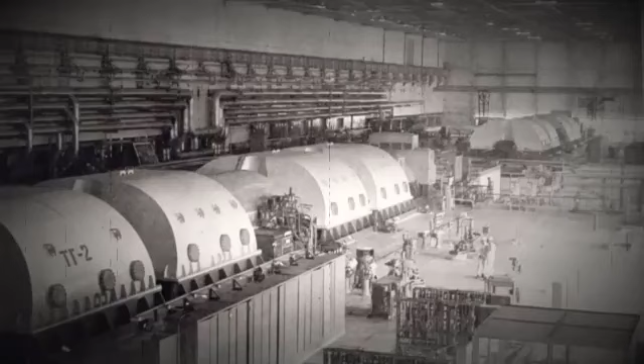The nuclear power plant had the first of its 4 reactors ready to operate in 1977, followed by number 2 in 1978. As a quick side note, Units 1 and 2 were the first generation RBMK 1000 reactors, and because of this they had slightly different core loadings and containment structures. But the remaining 2 reactors at Chernobyl were of a slightly more modern second generation, and they were named Units 3 and 4, which went online in 1981 and 1983 respectively.

There were plans for another 2 units, but these were abandoned after 1986 when risks of contamination left the project untenable. The nameplate capacity of Chernobyl Nuclear Power Plant was Unit 1 at 1000 megawatts of electricity, Unit 2 at 1000 megawatts of electricity, Unit 3 also had 1000 megawatts of electricity, and the same with Unit 4.

In this video, I'll be focusing on the second generation RBMK, its design, and more specifically Unit 4. But I did look into the first generation in the Leningrad video.

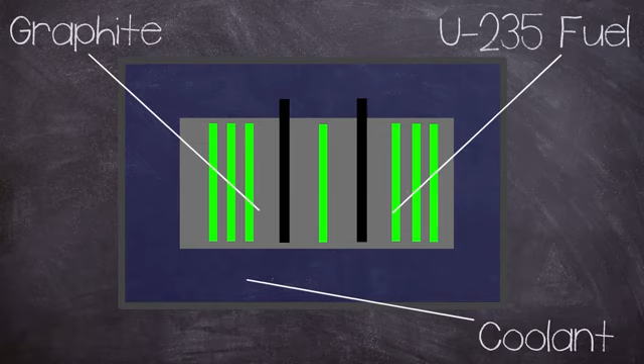The RBMK was a bit of a unique design in the reactor world, but it was a product of evolution rather than revolution, in that it used graphite to moderate the chain reaction with light water as a coolant. This combination allowed it to use lower enrichment uranium-235 for fuel, which is significantly cheaper than other reactor designs. The RBMK had a very large core region consisting of a height of 7 metres and a diameter of 11.8 metres, which was mounted in a steel cylinder that was placed on top of a biological shield.

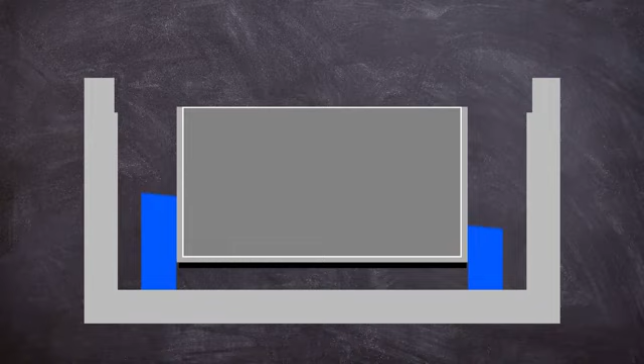The steel cylinder was 16mm thick and had a diameter of 14.52 metres by a height of 9.75 metres, dug into the floor of the reactor building, inside a reinforced concrete lined pit. Between the steel wall and the concrete lining, a water tank was placed, followed by a sand packing. Below the bottom biological shield, there were several basements used for pipework for the reactor core cooling loops.

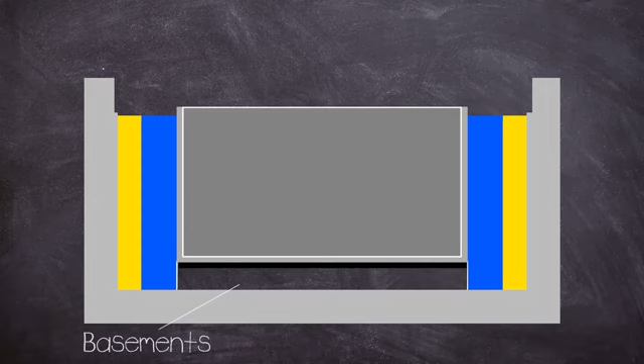The core consisted of graphite blocks sized 25 by 25 centimeters, stacked up with holes drilled through the center for fuel and control channels.

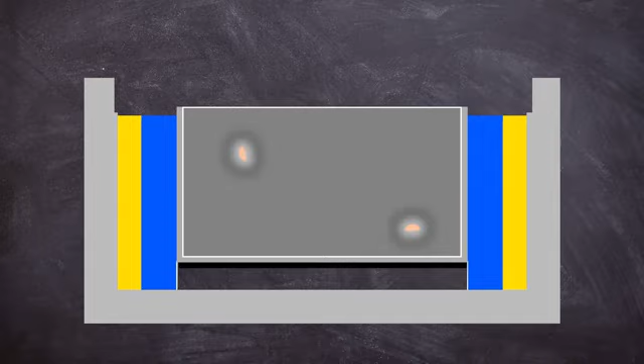The size of the core could cause issues in reactivity control during operation, but we will talk about that a bit later on. On top of the core, another biological shield was placed with a steel cover on top of it, which formed the floor of the reactor hall.

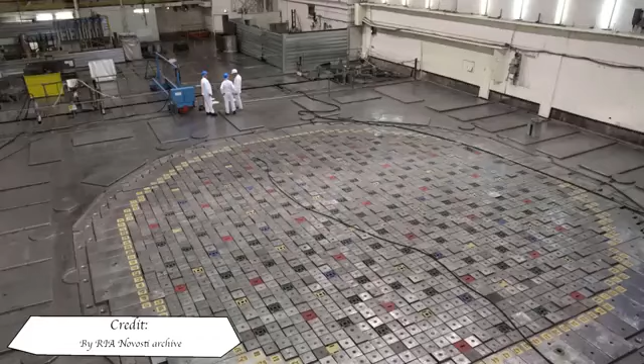The cover plate was capable of withstanding a pressure build-up resulting from steam released by two simultaneous channel ruptures. All of this allowed the design to be refueled whilst in operation, which again helped with costs by reducing downtime.

As a side effect of this, the confinement structure of RBMK reactors is less than ideal, as the tall refueling machine had to be housed inside the reactor hall. Because of the large floor space and subsequent roof requirements, the vast quantities of heavy concrete wouldn't have been architecturally, or more importantly, financially viable.

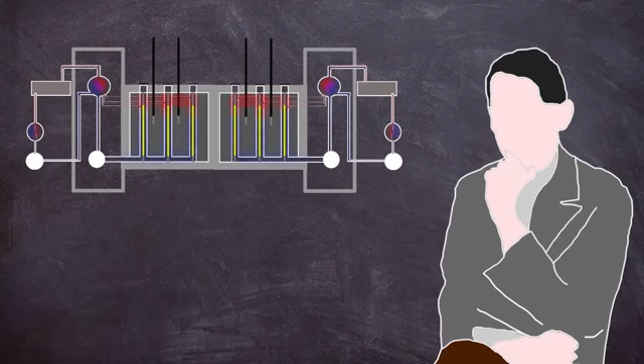The RBMK didn't have a prototype and was instead put straight into production, with the first reactor being installed in Leningrad in 1970. The original designs omitted confinement, instead claiming that the fuel being in its own channel with flowing cooling water was an acceptable alternative.

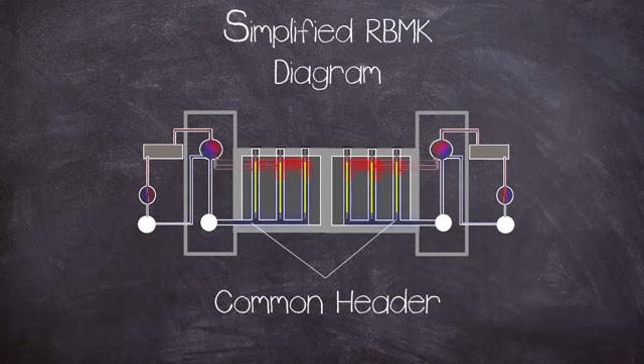The main takeaway from this is confinement was poor, resulting in disastrous results in the case of a fission product release. The coolant was pumped through the core, from the bottom common header through a high pressure tube that jacketed the fuel elements, where the water would boil. Coolant water also circulated in the control rod channels.

The primary cooling of the reactor was via two separate cooling circuits, one for each half of the core, meaning everything was doubled up, leading to four main circulating pumps, which were three operating, and one standby per loop.

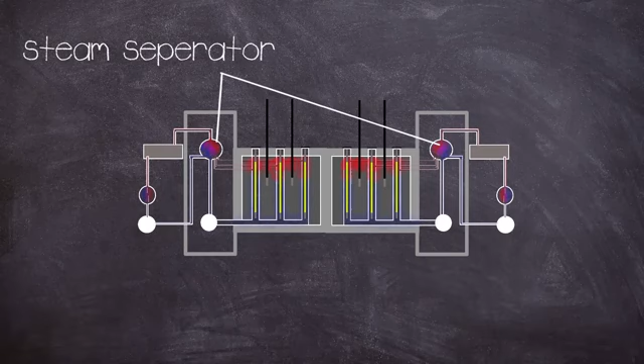As the coolant boils, it exits the top of the core and is passed through a water steam separator, which takes the steam to high then low pressure turbines that generate the electricity. The steam is then passed through a condenser that turns it back into water to be pumped back into the core, completing the primary cooling circuit.

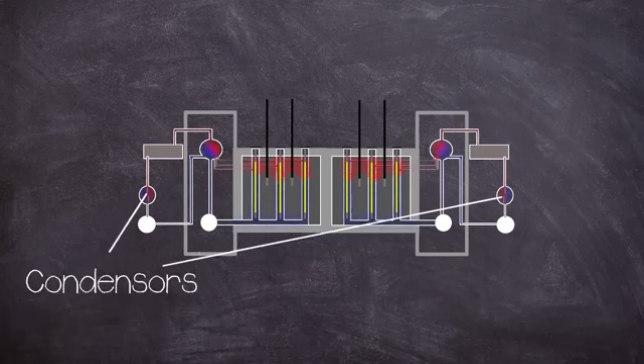The condenser is cooled by using a separate secondary water cooling circuit, meaning the primary cooling circuit is self-contained. As mentioned before, the reactor employed graphite blocks for its moderator.

Now, a moderator is used to reduce the speed of fast neutrons released from fission, so they can better facilitate a chain reaction, getting more use out of the fuel. Ideally, moderators work without capturing any neutrons, leaving them as thermal neutrons.

But where the design has its potential flaw is having a separate coolant that can also absorb neutrons, which can make the reactor unstable in certain situations. This brings up the big elephant in the room, and that is void coefficient.

You see, it wasn't just the graphite that had moderation characteristics, but the coolant water as well, because H2O naturally slows down and absorbs neutrons. This brings a problem for the reactor, as with the increase in temperature from fission, the coolant boils off into

steam, known as voids, i.e. a bubble that does not absorb neutrons. With the steam not absorbing neutrons, this leads to an increase in the power of the reactor.

The RBMK did not rely solely on its coolant for moderation, because that's what the graphite was for, but the water did absorb neutrons, meaning that as it boiled off, the operators had to compensate for this with the control system.

If not properly managed, an incident of a runaway can happen as the coolant heats up, increasing reactivity, heating up the coolant more, creating more steam, leading to greater reactivity, and this is called a feedback loop. During this reactor state, more and more neutrons are produced and their density grows exponentially fast, creating a positive void coefficient. The risks of a feedback loop were greater at certain power levels, but this will be covered later on.

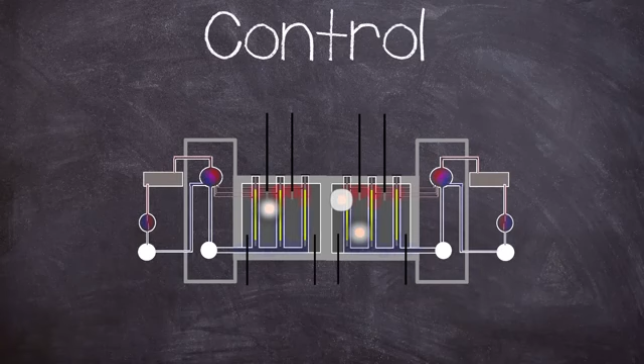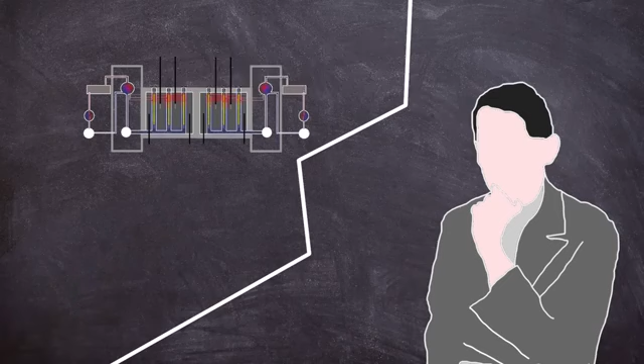And this leads on to the strange design choice for both top-loaded and bottom-loaded control rods. There were 167 top-loaded rods and 32 shortened rods loaded via the bottom, and another 12 automatic controls inserted from the top. The shortened rods were used to manage axial power distribution, which was necessary due to the core size to manage hotspots.

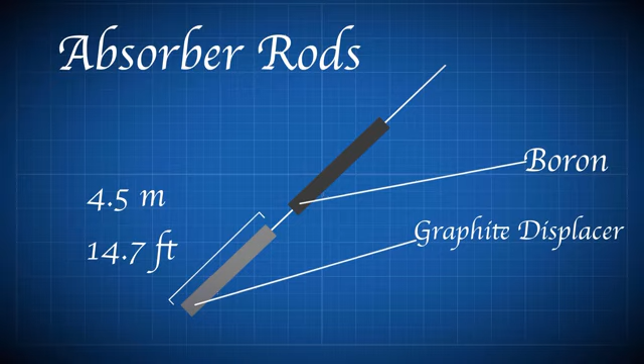The main control rods had a 4.5 metre long graphite rod termed a displacer attached to the end of the length of the control rods, except for the 12 rods that were used in automatic control.

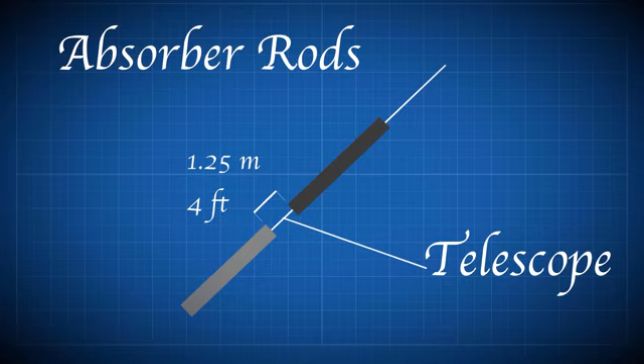The displacer connected to its rod via a telescope, with a water-filled space of 1.25 metres separating the displacer and absorbing rod. This was to stop water filling the space left behind by the control rod after it left the core region, which would parasitically absorb neutrons.

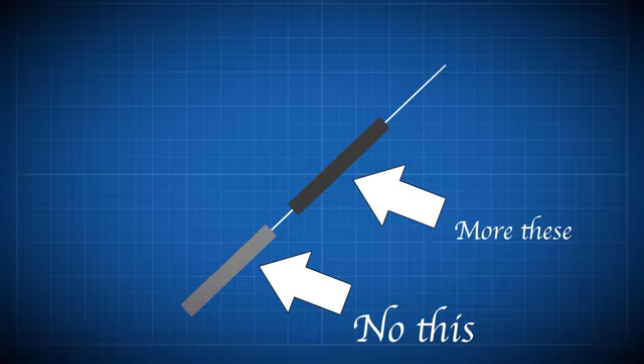Because removing one neutron absorber in the form of a boron control rod would be replaced by another neutron absorber, albeit weaker, in the form of H2O, this kind of defeats the point of a control rod. Thus, if there was no displacer, more control rods would be needed, as each one would have less of an effect on the reactivity of the core.

The dimensions of the rod and displacer were such that, when the control rod was fully extracted, the displacer sat centrally within the fueled region of the core, with 1.25 metres of water at either end. But this setup in certain situations could cause a positive scram effect.

On receipt of a scram signal causing a fully withdrawn rod to fall, water was displaced from the lower part of the channel as the rod moved downwards. This caused a localised insertion of positive reactivity in the lower part of the core.

This was because the RBMK had a high moderator to fuel ratio, meaning the lower part of the core would experience a spike in reactivity as the graphite displacer entered it, replacing the neutron absorbing water with neutron moderating graphite. But this situation was only dangerous at certain power levels of the reactor, which was meant to be mitigated by the knowledge and training of the operators, and also importantly by their management.

Part of this mitigation was by having an operating reactivity margin. The ORM is the number of equivalent control rods of nominal worth remaining in the core.

The total time required for a scram, or insertion of the emergency control rods into the core when starting from the upper limit stop switches, was around 18 seconds, which was relatively slow. But this was due to the size of the control rod channels and the fact that the coolant had to be pushed out of the way.

The scram could be initiated by the control system or manually via the AZ5 button. The control system employed on the RBMK 1000 utilised ionising chambers and various sensors both inside the core and outside, which were effective from power levels above 10% of total power.

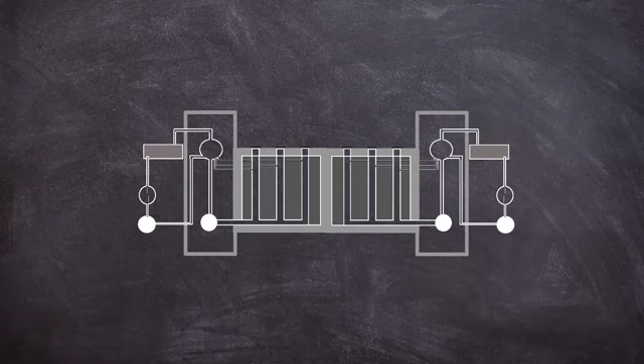The external detectors were all mounted mid-level of the core, meaning no low axial power monitoring could be undertaken. This meant that low power operation below 10% had to be done by the operators relying on experience and feel when monitoring the equipment. But manual low power control was only really intended for a cold startup, so to speak.

This was when the reactor was free of the neutron absorbing poison Xenon-135. I need to mention neutron poison, as it will play a vital part later on, and was also a contributory factor in another RBMK incident, the meltdown in Leningrad in 1975.

During fission, some products are given off, one of which is Xenon-135, which has a high neutron absorption rate. This is okay when the reactor is in a steady state, as it burns off this undesired byproduct, as poison burning is proportional to reactor power.

But when the power of the reactor is decreased, the Xenon-135 is not burned off, and can shut down the chain reaction by absorbing too many neutrons. This is known as an iodine pit.

All is not lost, as Xenon-135 has a relatively short half-life of around 9.2 hours, so a reactor core is considered poison-free after several half-lives have passed. But this is not good from an economic standpoint, as the unit would be shut down for a few days, which is where good management is meant to come into effect, where safety is prioritised over money.

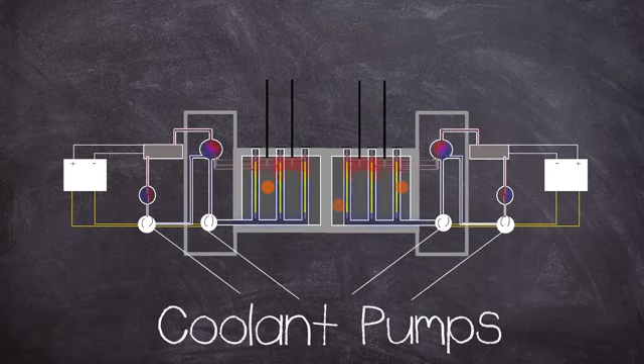When the reaction stops, heat generation continues for a while after shutdown. During power operation this is fine, as electricity is being produced, but after shutdown, the pumps need to keep circulating to remove the decay heat.

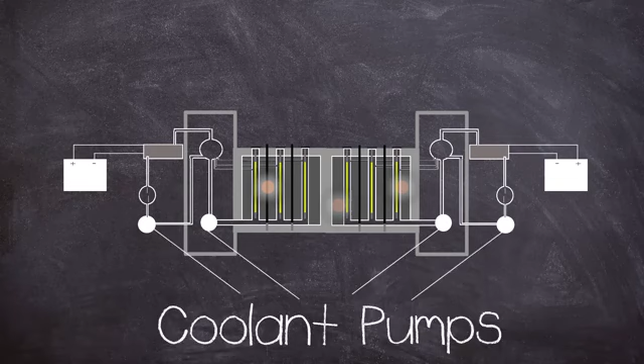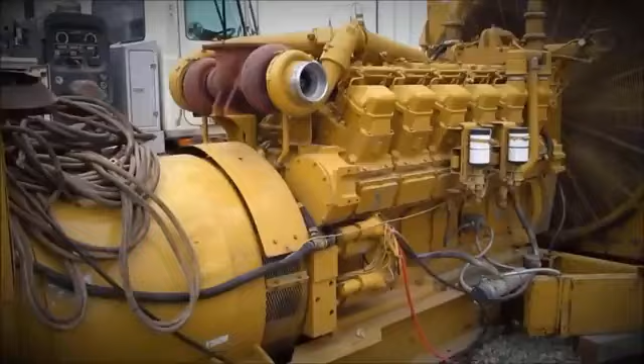Usually the electricity needed for the pumps can be drawn from the national grid. But what about if there is a full power outage? Then backup is needed. This presents a problem: if a reactor is shut down and there is a power cut, how will the pumps keep working? Well, the solution is pretty simple, and that is a diesel backup generator.

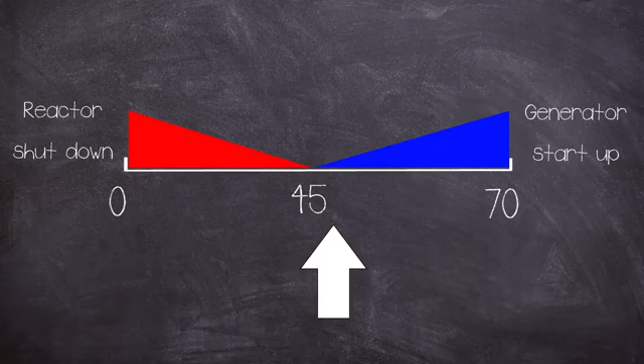Each of Chernobyl's reactors had 3 backup diesel generators, which took in excess of 70 seconds to reach full power - too much time in the event of a full power cut. In theory, some of this time could be covered by the spool down of the turbo generators, theorised to cover around 45 seconds. Not the full time needed, but possibly enough to prevent fuel melting.

To prove that this could work, it had to be tested out, and in 1982, 1984 and 1985 this was attempted, but all tests failed to produce the electricity needed to run the pumps. The test was to be conducted again in April 1986.

Strangely, the test procedure that was written hadn't taken into account the eccentricities of the RBMK reactor, especially at low power outputs. The test was to be conducted during a routine shutdown. For the test to go ahead, some vital systems had to be switched off, most notably the active-passive emergency cooling system used in a loss of coolant accident. This required the chief engineer to sign it off.

In preparation for the test, the following had to be set up: the reactor power was to be reduced to between 700 and 1000 megawatts of thermal energy, and the steam turbine generator was to be at normal operating speed.

After all this was sorted, the preparations for the electrical test could go ahead. The steam supply to the turbine generator would be closed off. The turbine generator performance would then be monitored to see if it could bridge the power for coolant pumps until the emergency diesel generators took over. When the emergency generators supply electrical power, the turbine generator would be allowed to continue freewheeling down. The normal planned shutdown procedure of the reactor was then to be completed.

The date of the test was to be the 25th of April 1986, 15 minutes past 2 p.m, completed by the day shift. As such, the operators were briefed on the procedure and a team of electrical engineers was present. At around 1 a.m. on the 25th of April, the reactor was gradually powered down to around 50%, in time for the day shift.

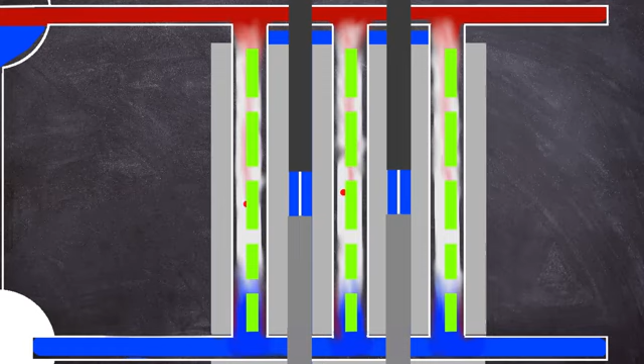The night shift operators had to prepare for the test in a short period of time. In theory, after the test was completed, the team would have a straightforward night, just monitoring the decay heat until the next crew changeover. As the power dropped off, the high amounts of iodine-135 decayed into the poison xenon-135, as it was not being burned off quick enough.

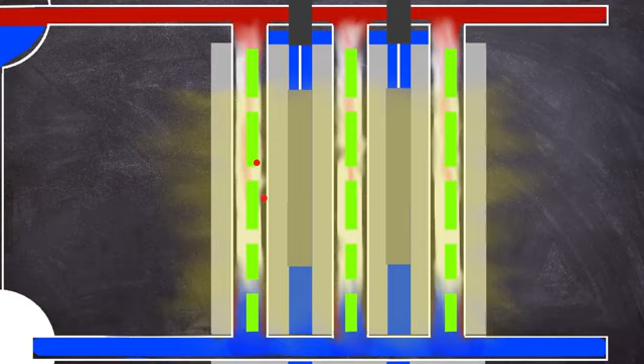This reduced the power of the reactor without any operator intervention to 500 megawatts of thermal energy, at which point manual intervention was started in order to maintain the level. At 28 minutes past 12 on the 26th of April, the reactor power had dropped to just 30 megawatts of thermal energy, with a near shutdown-like state.

It is not 100% known why, but both equipment failure and operator error have been attributed to the reactor state.

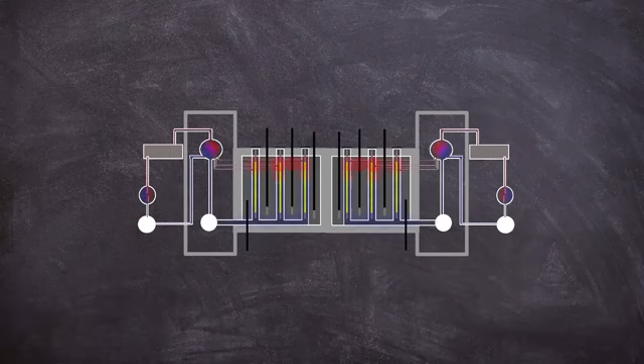As set out in the operating instructions, the reactor should have been powered down to wait for the xenon-135 to decay, but shutting down the reactor without doing the test wouldn't have made many friends in management. To increase the power, the control rods began to be removed to try and overcome the poisoning of the core, reduced coolant void, and graphite cooldown.

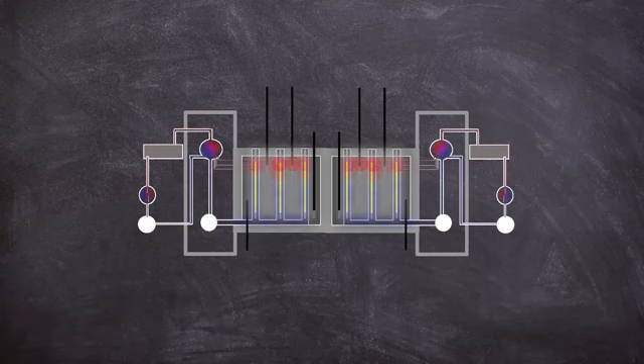In the attempts to raise the power, the operational reactivity margin was violated by removing more of the absorbing control rods, and by 1 AM around 200 megawatts of thermal energy was reached. The reactor was now in a dangerous state.

Not wanting to leave empty-handed, Dyatlov insisted that the test be conducted at the current power level. In reality, the core was heavily poisoned and was in a dangerous state with very few absorbing rods for emergency control. During the preparations of the test, the operators powered up the 2 backup coolant pumps, leading to all 8 working. The increase in water flow reduced the voids within the core, which would have set off an automatic scram, but this was bypassed by the operators.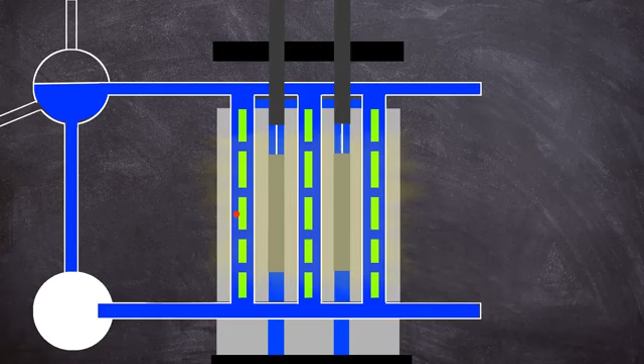As the coolant absorbed the neutrons in the core, only 8 control rods were left as a safety margin. The minimum that the ORM stipulated was that around 28 rods should have been in the core.

The reactor started to experience a feedback loop. With not many rods in the core to manage the power, the situation was that the water in the reactor found itself being the main neutron absorber, and disaster was just waiting to happen.

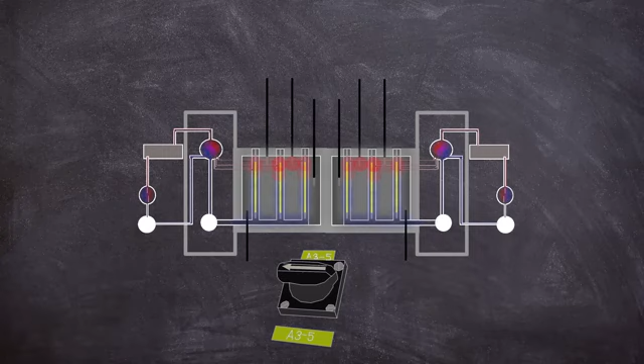At 1:23 in the morning, the actual test had now begun. The command given to stop the valves for turbine number 8 closed and the rundown operation started. As the turbine spooled down, the power to the feed water pump slowed, increasing the temperature of the coolant, creating more voids. With less water absorbing neutrons, the power of the reactor began to rise.

A feedback loop was beginning to start in the lower part of the reactor core. The operators pressed the AZ-5 button in response to the worrying increase in power, and the control rods started their travel into the reactor core.

As the control rod attached graphite displacers moved down to the lower part of the core in their control channels, the neutron absorbing water was pushed out of the way, creating a momentary spike in power, replacing it with neutron moderating graphite. During the spike, some of the fuel rods ruptured, blocking the control rod columns, stopping the control rods.

This left the control rods stuck at 1/3 insertion, with the graphite water displacers stuck in the lower part of the core, increasing the runaway power excursion. Within 3 seconds, the reactor power rose to 530 megawatts of thermal energy. In the control room, a few shocks were felt, and the control rod indicators showed that the insertion had stopped.

As the channel pipes began to rupture, mass steam generation occurred as a result of depressurization of the reactor cooling circuit. Fission materials leaked into the coolant, and steam pressure grew inside the core as the coolant boiled off, creating a greater neutron population. The reactor power hit 30,000 megawatts of thermal energy, although it is thought that the power could have gone much higher than that during the excursion.

The steam blew off the top steel cover and top biological shield of the reactor as more than the 2 designed fuel channels failed, releasing debris into the reactor building. This was what would later be described as the first explosion, but it would not be the last.

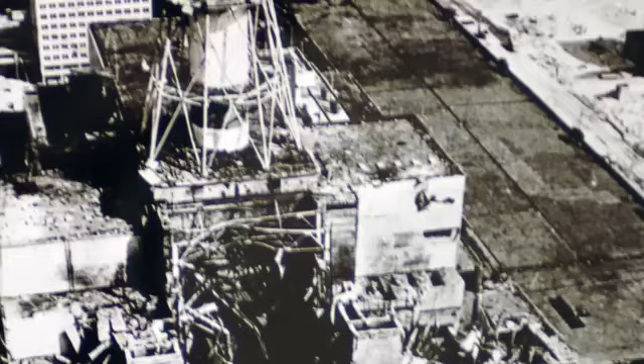Some of the debris that was ejected started a fire on the roof of Reactor 3's building, but insanely the unit wasn't shut down straight away. Instead, the operators were told to take iodine tablets and don respirators.

At 1:45 in the morning, the first responders from the Chernobyl fire team arrived under the command of Lieutenant Vladimir Pravik and began trying to extinguish the flames on Unit 3's roof. All around them lay pieces of Unit 4's graphite core.

The firefighters were only aware of the fire, and because of this they didn't have any radiological protective clothing on. As they worked, they breathed in some of the fission material in the form of dust and were exposed to the deadly radiation.

Many would come down with acute radiation sickness shortly after. Some of the first responders felt a metallic taste in their mouths, similar to what others had reported post-exposure, for example from the victim of the Wood River Junction criticality.

The fires on the roofs of Units 3 and 4 were under control between 2:10 and 2:20 in the morning, and the fire was fully put out at 5 o'clock in the morning. However, the graphite fire in what was once Unit 4 continued to burn, expelling its radioactive plume of dust, steam and smoke into the atmosphere.

The operators started to pump water into the core, but this did little to bring the situation under control. The estimated dose of 5 to 6 Röntgens per second was experienced around some parts of the reactor building, which is equivalent to more than 20,000 Röntgens per hour, enough to give a lethal dose in minutes.

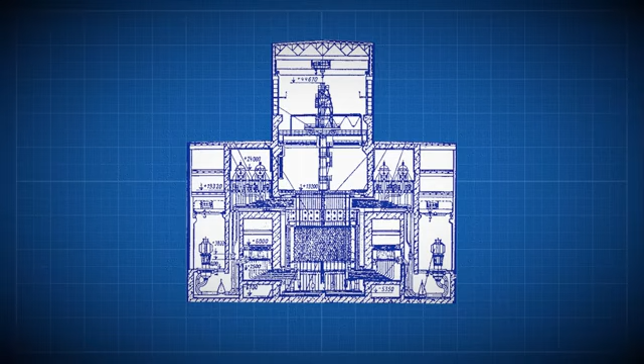The fuel from the core was melting towards the flooded basement. But below that was more water from the bubbler pools, a large water reservoir for the emergency cooling pumps and a pressure suppression system. Needless to say, this was the next point of focus for the accident management team.

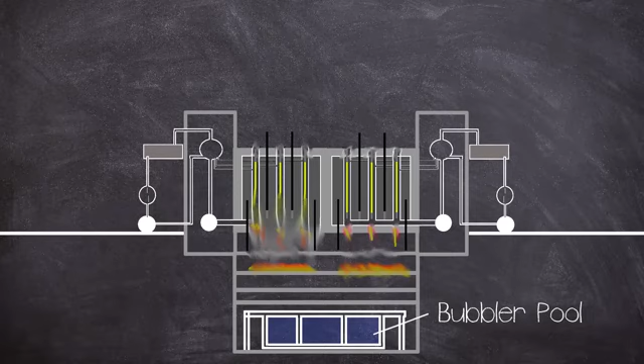Engineers Alexei Ananenko and Valery Bezpalov, and supervisor Boris Baranov, volunteered to empty the bubbler pools. This was done by valves controlling sluice gates, housed in a room that had now become flooded. All three men donned protective suits and breathing equipment and made their way down the corridor. The men were successful, and the bubbler pools began to empty.

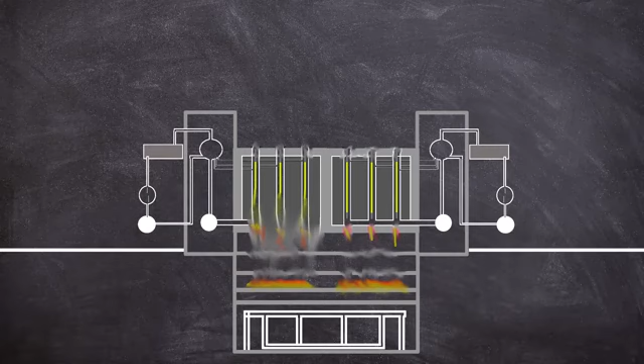Surprisingly, all three survived, not only the day but continued to live long after the disaster, averting the immediate steam explosion. But that wasn't the end to the worry of a deadly explosion. As described in the film China Syndrome, the core could continue to melt through the floor of the containment and into the earth, eventually hitting the water table, meaning another steam explosion.

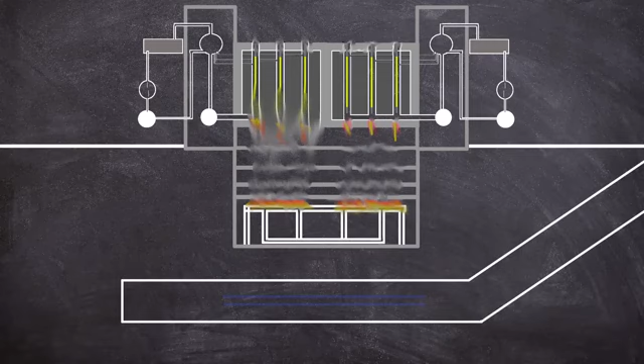The next focus of the accident management team was stopping the molten core from escaping the bottom of the reactor basement. A design thought up by physicist Leonid Bolshov involved digging out a cavity below the reactor building basement. The concept used a coiled formation of pipes cooled with water, covered on top with a thermally conductive graphite layer. The graphite cooling plate was to be encapsulated between two sacrificial concrete layers, each one metre thick. In theory, as the molten uranium oxide hit the graphite, it was to rapidly cool down, catching the core meltdown.

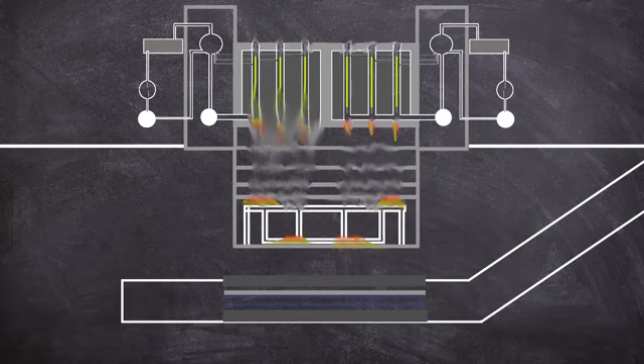Thankfully, the theory didn't have to be put into practice, as the core had finally come to rest in one of the lower basements of the reactor building, part of which formed the famous Elephant's Foot, discovered in December 1986, which had a radioactivity of 8,000 roentgens, or 80 grays per hour. For reference, a whole body dose of around 5 grays can be lethal.

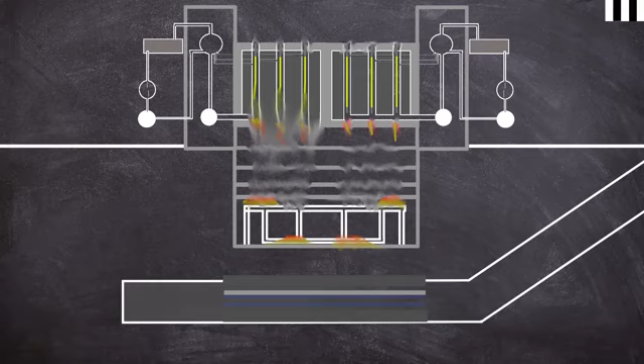The molten material is known as corium, a mixture of the material found inside the core, mainly made up of silicon dioxide with traces of uranium, graphite, zirconium and titanium. The excavated cavity and cooling system, now unneeded, was filled with concrete to help the structural integrity of the heavily damaged reactor building.

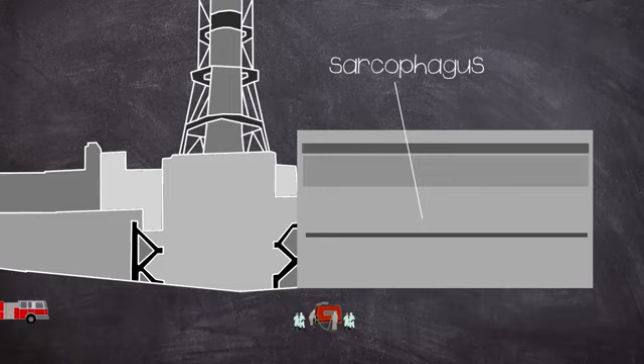A plan was conceived to contain the contamination release of Unit 4 in the form of a concrete lid, which would come to be known as the sarcophagus. Construction began in May 1986, 24 days after the disaster, to encapsulate some 200 tonnes of radioactive corium, 30 tonnes of highly contaminated dust, and 16 tonnes of uranium and plutonium. The construction would last for 206 days, between June and late November of the same year.

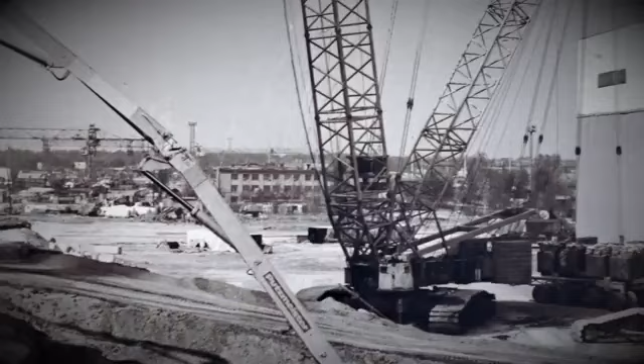But before the core could be enclosed under the sarcophagus, the next phase of remediation was to remove all the core material scattered across the area, and one of the most dangerous places was the roofs of the buildings surrounding Unit 4. Initially, robots were thought to be able to undertake the clearing works, but due to radiation interference, only around 10% of the debris could be recovered.

This necessitated the use of good old-fashioned people. The most basic of equipment was needed for the task, including protective clothing and a shovel. A total of 5,000 people, known as liquidators, were called upon to undertake the cleanup on the roof, each only allowed between 45 to 90 seconds of total working time to reduce the risk of exposure. The calculated risk was 25 rem, or 250 millisieverts, of radiation per person.

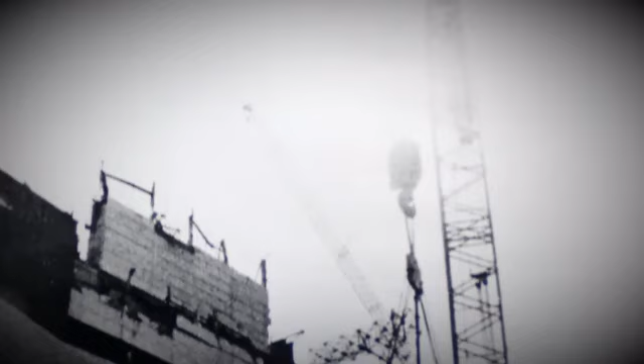There were many more liquidators also used for other clearing-up works in the wider area. Finally, after this, the sarcophagus could be closed over the turbine hall and reactor building. The construction was undertaken over 8 stages, all whilst Unit 4 released contamination, next to Unit 3, which still needed to be operable. Concrete containment walls were built around Unit 4, and a dividing wall was erected between it and Unit 3. The sarcophagus was placed on top of the concrete containment walls.

More than 400,000 cubic metres of concrete and 7,300 tonnes of metal were used during the construction of the sarcophagus. The building encapsulated an estimated 740,000 cubic metres of heavily contaminated debris together with contaminated soil. Holes were installed in the structure to allow pressure release, albeit through a filtration system.

The shelf life of the structure was only thought to be around 20 to 30 years, necessitating a new containment structure, but this will probably be covered in the next video in this series.

So, with an official death toll of 31, a nuclear power plant essentially unusable, and many decades ahead of remediation works, how was Unit 4 allowed to be operated in such a dangerous state? Unsurprisingly, it comes down to management.

The warning signs of the potential for fuel damage in an RBMK-1000 reactor reared their heads several times through the reactor type's history. A partial fuel melting in Leningrad over 10 years before in 1975 had been covered up, and information was not passed on to other RBMK operational staff at different power plants. Again, the fuel melting incident that happened in 1982 at Chernobyl Unit 1 was also covered up, this time by Viktor Brukhanov, meaning lessons again were not passed on.

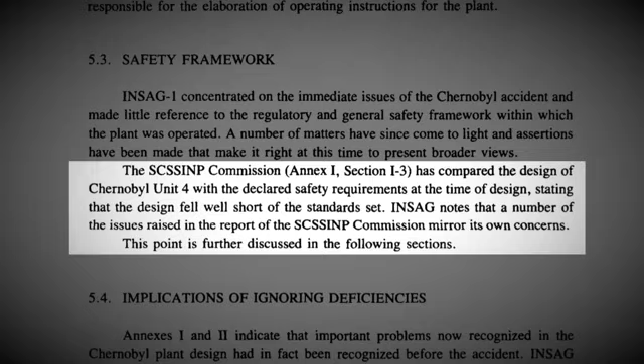This was all highlighted in the 1992 INSAG 7 report, which also said in its summary, the plant fell well short of the safety standards in effect when it was designed, and even incorporated unsafe features, compounded by inadequate and ineffective exchange of information between both operators and between operators and designers.

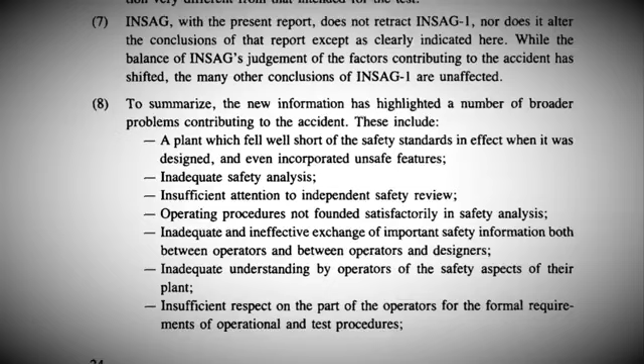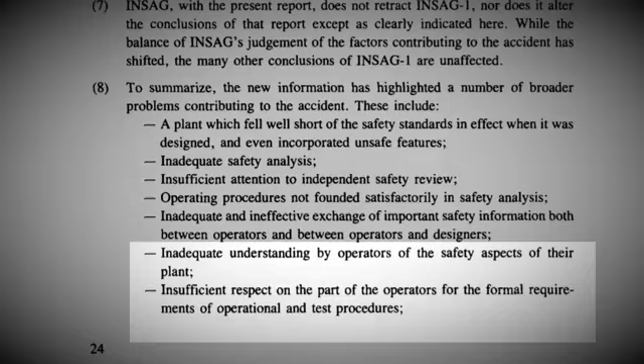There was an inadequate understanding by operators of the safety aspects of their plant, also affected by insufficient respect on the part of the operators for the formal requirements of operational and test procedures. The industry in the USSR had an insufficiently effective regulatory regime in place to counter pressures for production.

The pressures from central government and lack of awareness of the design risks of the reactor meant that management acted dangerously in the false pretense that the RBMK was indestructible. Pretty much the entire management structure was throwing around a grenade that they didn't know had the pin pulled out of, meaning disaster was only a matter of time.

Now I'll be following up this video with another video at some point about the wider impact of the disaster on local and wider population, as well as digging deeper into the liquidators and their heroic work. Thanks for watching, I hope you enjoyed the video.